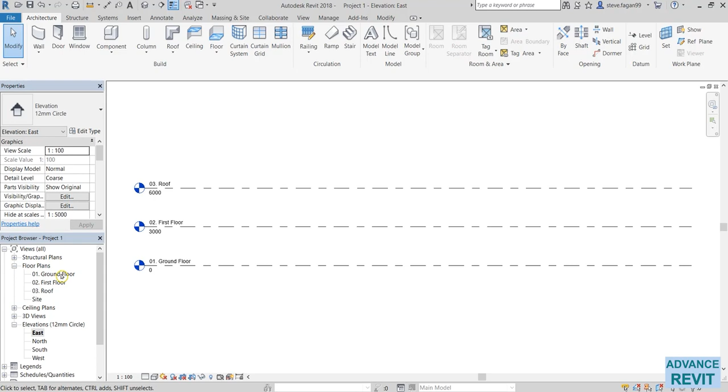Next, we're going to add our grid system. So to do that, we'll go over to our ground floor plan. So back over to the project browser, floor plans, and double click on ground floor. So to place our grid, it's in the architecture tab. Again, down the very end in the datum panel.

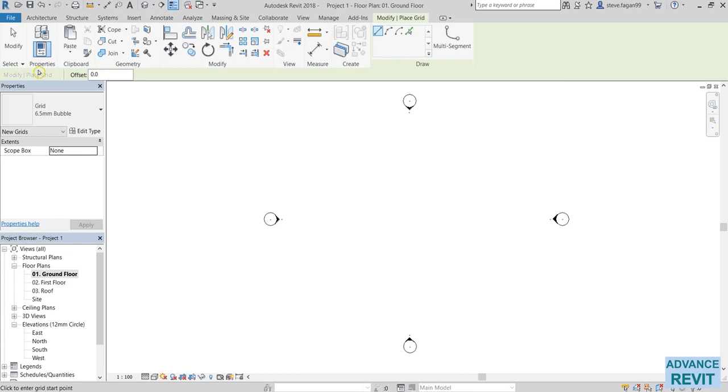So we've just placed our level. Below that is our grid. So I'll click to activate the tool and the contextual tab will appear. So this is our couple of methods of how we can place it. Either by straight line, we can do start end radius, center end arc, or pick line. As well, when we're placing it, we can add an offset.

So to place the grid, again, it's like placing a level. Click once to start, drag the cursor and click again to finish. I'm going to press escape just to come out of the draw function and escape again to finish the grid. So if I select my grid, you'll notice again we have the same features as the levels. So we have our tick boxes there for our bubble, the open grip there to extend, and there's the elbow.

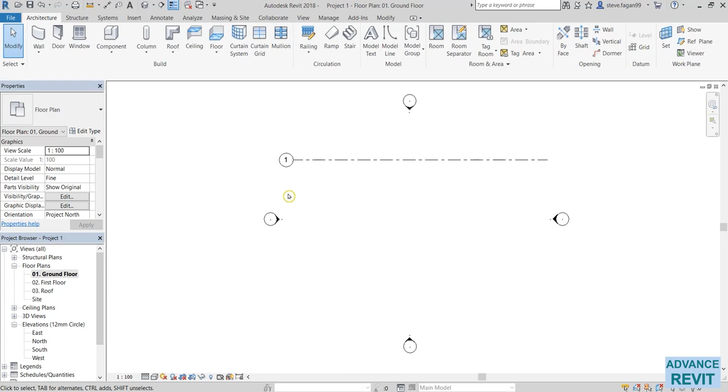With the grid again, by default, we'll start with 1. And when I place my next grid, it will automatically be 2. But for this project, we're going to start with our horizontal grids alphabetically. So if we just select the text by clicking, our text will appear like so, and we'll type in A. Again, pressing enter to finish and escape. Once I've done that, I'll go back to the grid, click.

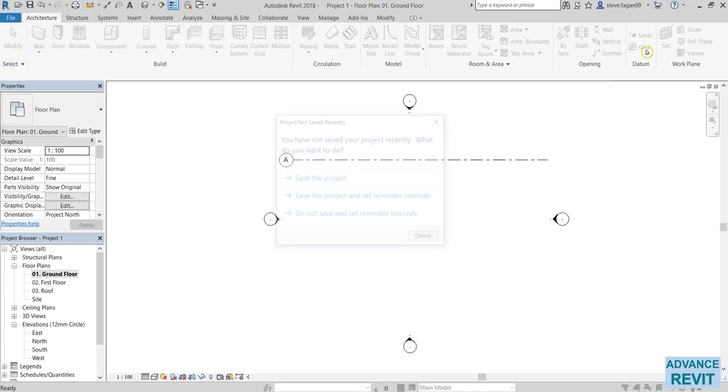So right now I've just been prompted to save the project. So in Revit, we're able to specify how often we want the software to prompt us to save. I've set mine to 30 minutes. So every 30 minutes I'll get this little display screen and it's going to prompt me to save. So I'll just select save.

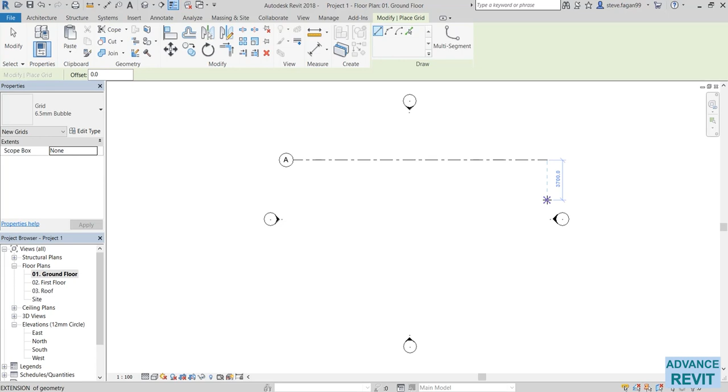And again, now I'm just going to place my grid. So lining up with the end, so I get that temporary vertical dimension, click to start and click to finish. It's automatically named itself B. So I'll press escape. So again, when I select B, you'll see I have my temporary dimensions, my padlock, my grip, so all same features.

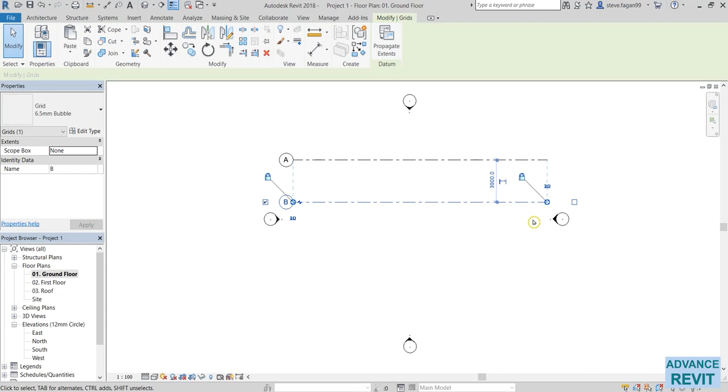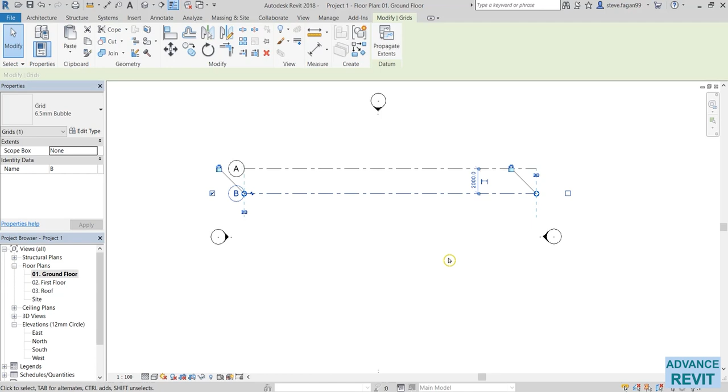So what I'm going to do now is start to place all of the horizontal grid lines. Where I'm getting this information from is the PDF 001 grid system. In there, I've given you all of the dimensions between each one of the grid lines. So first off, between A and B, it's 2000. So to change the distance between A and B, I want to move grid line B, so I select grid line B. And you'll see there my temporary dimensions, it's 3900, so I'll select that and change it to 2000. And I can either press escape on the keyboard or just click away on the screen.

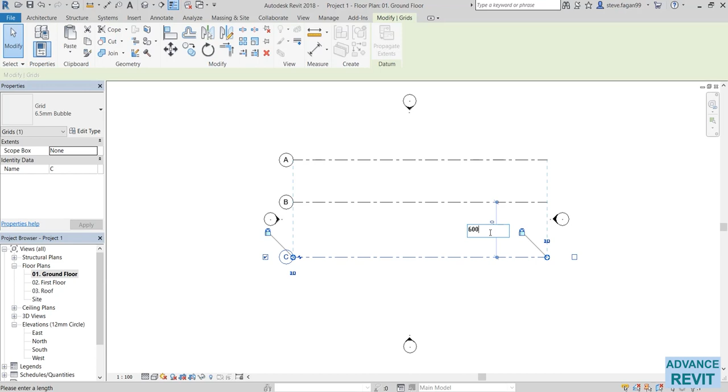So next I'm going to place grid line C. So again, I'll click on grid, click to place, click to finish and escape. So again, I can click on the grid, use the temporary dimensions here to enter in 6000. Or to speed things up, you'll notice between C and D is 3600. So when I click on grid, I'll hover over to get my vertical dimension and I can move my cursor up until I see 3600 displayed in the temporary dimension. So when I click to start and place, I know that that is now placed accurately at 3600.

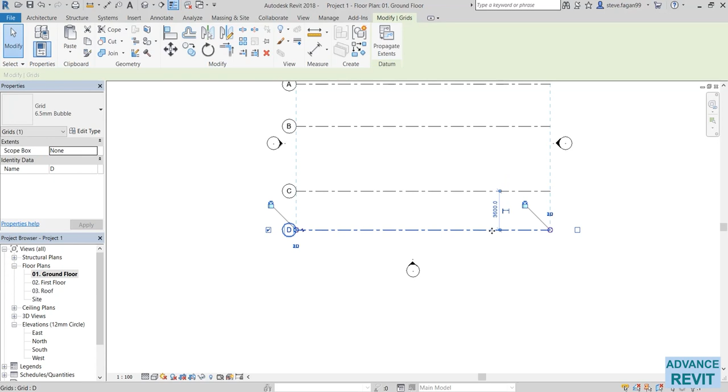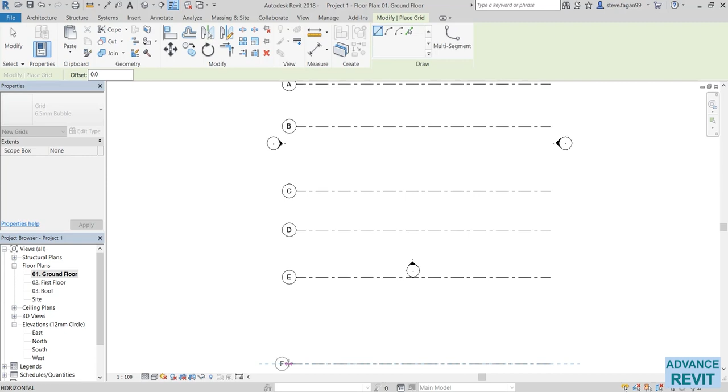Next, between D and E is 4400. So same method, just moving the cursor until I get 4400. Click and click again to finish. And again, the last is between E and F is 8000. Click and click. So there we have A to F. At the moment, ignore the elevation bubbles because we can move them later.

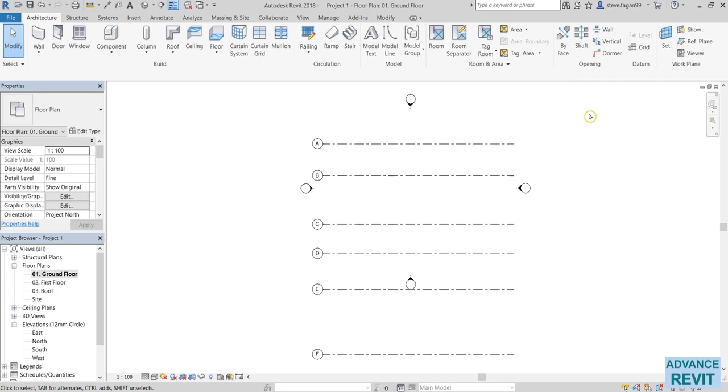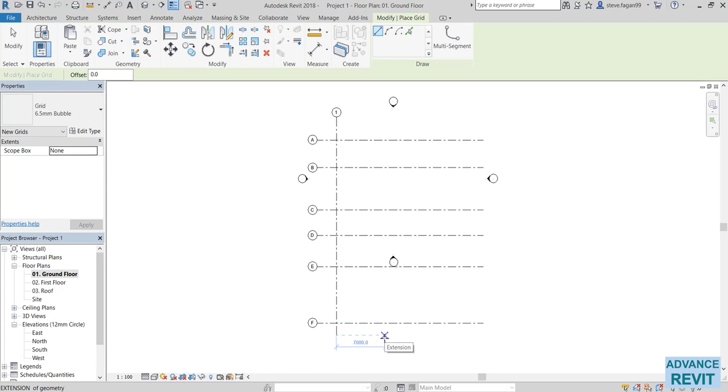Next, we're going to move on to grid lines 1, 2, 3, and 4. So same process as before, click on grid, click to start, click to finish. You'll notice it will automatically take on G, but we want to relabel them as 1, 2, 3, 4. So we'll select G text, enter 1, and now every time we place a new grid, it will automatically be 2, 3, and 4. So grid line between 1 and 2 is 7,000. So again, just moving my cursor across so it comes to 7,000. Click to place. Next is 8,000.

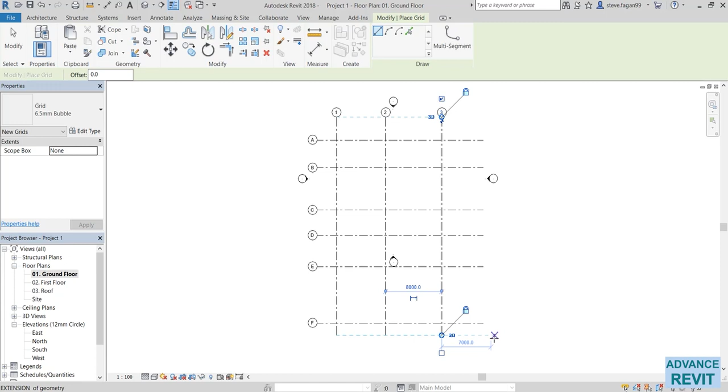And 7,200. Because I'm zoomed out quite a lot, you can see my temporary dimension is jumping from 7,000 to 8,000. So to go in increments of 100, if I zoom in, you can see the temporary dimensions are now going in increments of 100. So 7,200 is what I'm looking for. Click to start, click to finish. And you'll notice again, my bubbles are 1, 2, 3, and 4.

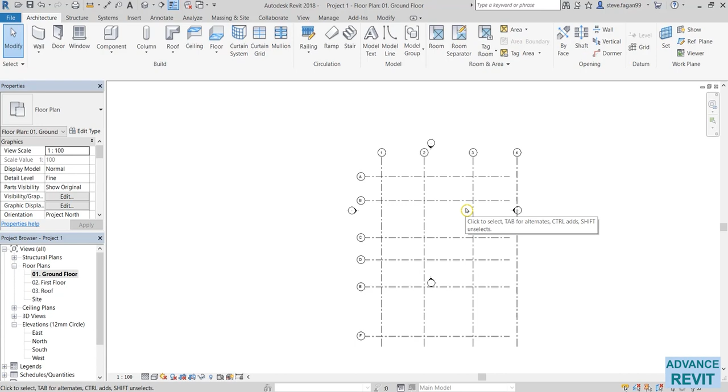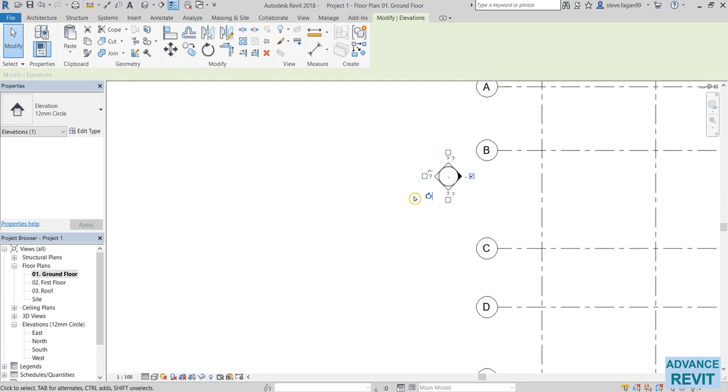So next I'm going to just move those elevation bubbles out of the way. So I've got two options. I'll click. Once it's highlighted, I'll get the drag symbol and then I'll just click and drag it away. Click and drag. You can also use the arrow keys on the keyboard to adjust the position. And double tap on the wheel to zoom extents. So now we just have to extend out our horizontal grid lines, and the vertical as well we can extend out slightly. And again, just adjust the position of the bubble.